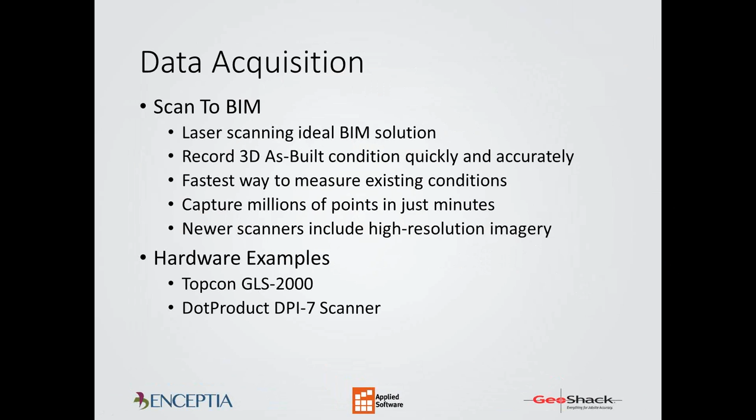I'm going to quickly show you two scanners, the Topcon GLS 2000 and the DotProduct DPI-7 scanner, and give you an example of how they're on two different ends of the spectrum, but can both be used and are very powerful for collecting data.

The Topcon unit you see here will shoot point cloud or measure out to over 1,100 feet, and it will easily collect points in full dome in about 3 minutes with images. There are 2 cameras on this unit, a telephoto lens and a wide-angle lens, so we can capture very high-resolution images if need be.

What's really different about this unit compared to others out there is that it will register scans automatically. Normally we have to set the scanner up on a tripod and move it to different locations in a particular area, then tie those different scans together afterward. This unit recognizes that during the scanning process and registers automatically for us.

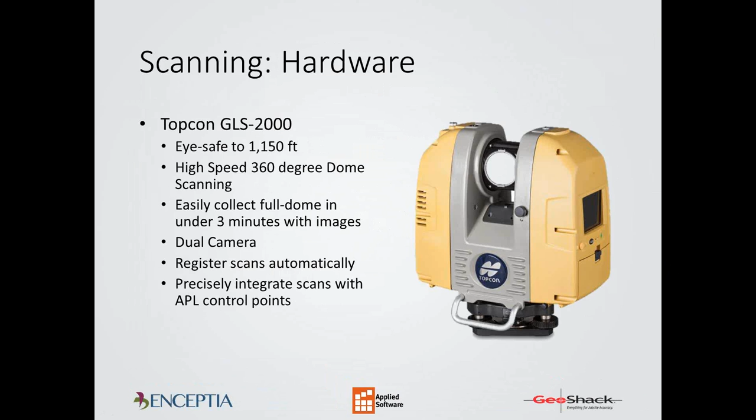Another important feature is that it integrates with APL control points. I'll show you Autodesk Point Layout a little later, but as long as we have control points at the job site in our model, we can take this point cloud and bring it into our model quickly and compare it to our design model.

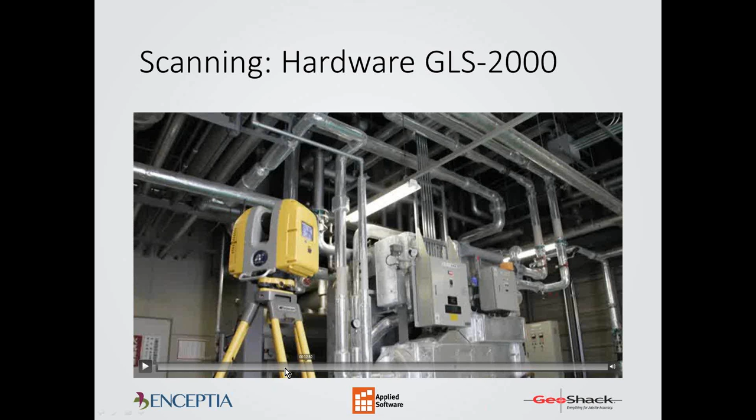Now I want to show you a quick little video, I'm going to turn off the volume here. It's a very short video. This is a picture of the room, there's the scanner. For those of you who haven't seen point clouds, you are looking at a point cloud.

Notice that as we move around, the imagery fades a little and we're looking at the points, but as we stop, all those images that have been recorded now become visible. So it looks like we're in a true three-dimensional model when really we're just floating around in our point cloud.

We do work with other partners that will recognize these points that represent a pipe and replace those points with an actual pipe, so there are ways to convert this point cloud into a BIM file to use back at the office. On the opposite end of the spectrum is this DotProduct DPI-7 scanner.

It's a small handheld unit, and what's great about this unit is it's great in tight spaces. One of the things with the larger scanners is that you have to move them constantly. They set up in one location, but they may not see the entire room because objects may be in the way. With this unit, you are literally walking around the space, and you can walk around objects that are hiding specific locations in the room.

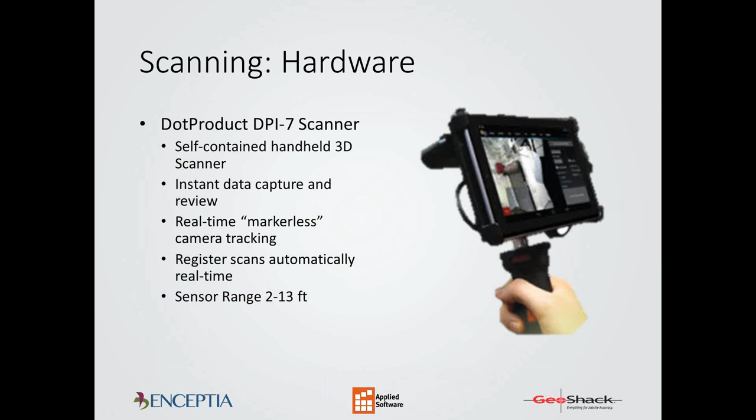It also has real-time markerless camera tracking. You may have seen scanners on job sites where they place markers up on walls or columns, used on purpose to tie those or register the scans later on. With this unit, it'll register the scans automatically. The range on this unit is anywhere from 2 feet to about 13 feet. That may not sound far, but for what this is designed for, it's the perfect solution.

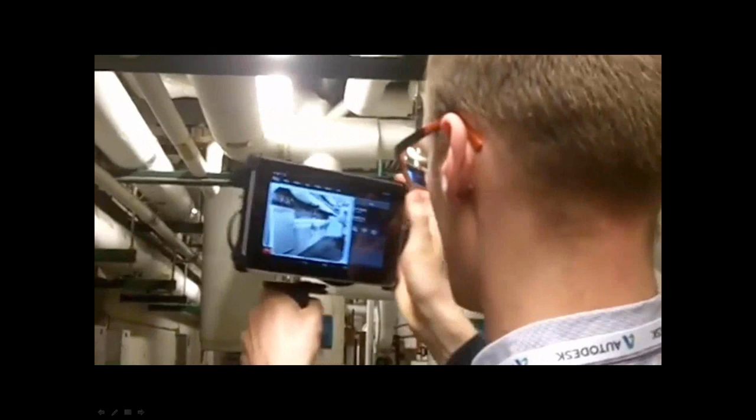I'll just show you a quick video of what it looks like running this scanner. Here we're holding the scanner. You got a nice big screen, you can see it, it looks like you're shooting video. But what we're going to do is get this set and hit the record button.

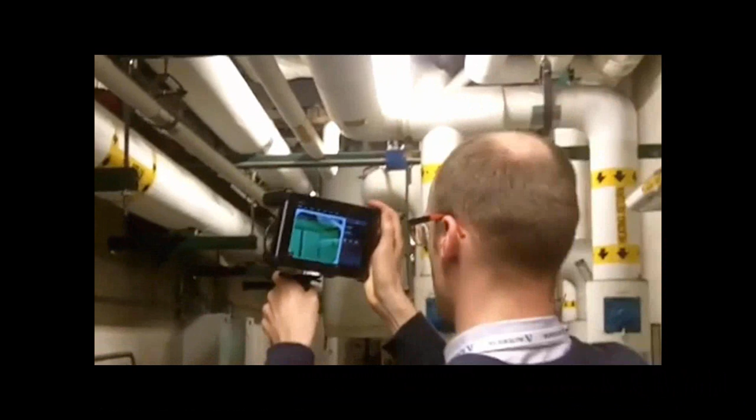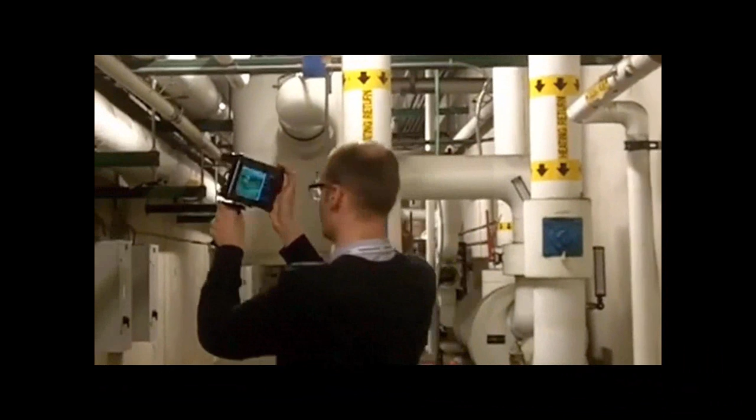The screen turns green, and now you're just walking along, scanning everything that you see on the screen. You move this up and down and around until you grab all your points. If later you find out you missed a spot as you're reviewing it here, you can go right back to it and it'll register the scan where you left off.

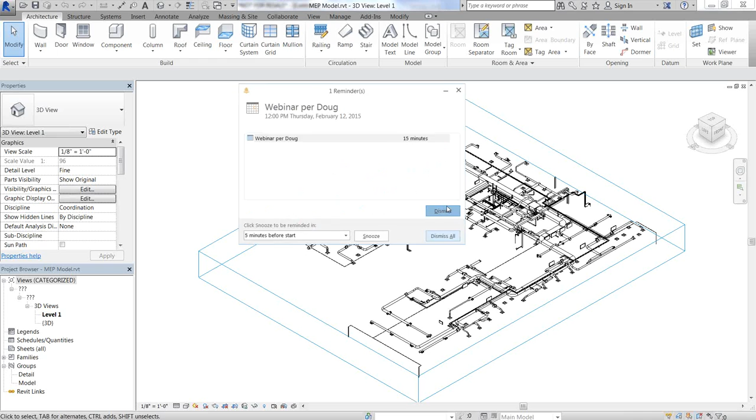To do so, for this example, I'm going to use Revit to export out my system and send it directly to ESTmep to get my estimate. So let's go ahead and select my medium pressure duct.

Now in my add-ins tab, I have store design line elements and store graphics elements. Store design line elements is used where Revit elements can be mapped to corresponding items in CADmep, such as ducts, pipes, straights, and fittings. Graphical elements is used where no mappings can be made between Revit elements and CADmep items, such as air handling units, pumps, and things like that.

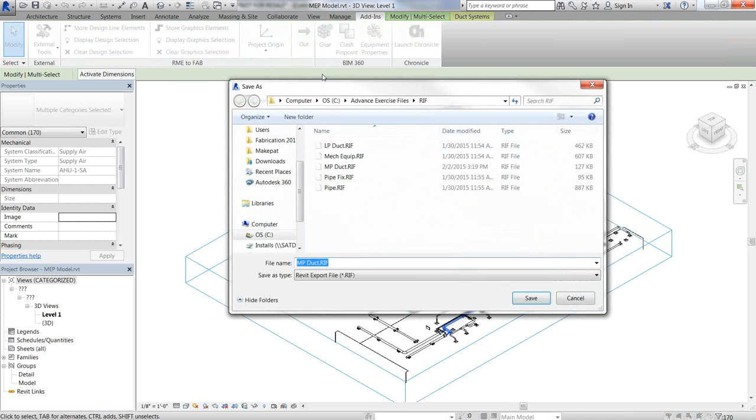So I'm going to select store design line elements and save this out as my RIF file. Once I have that done, I'll go ahead and bring that directly into ESTmep.

One thing I'll note here, with fabrication products having a unified database, I can bring this directly into ESTmep, and that will allow me to send it straight to CADmep to finish out the detailing and CAMduct. So that's really what I want to show in this process.

Go ahead and import that RIF file. You'll see here, I've already gone ahead, and it remembers since I've done this already, I have my system type and my system name. Here's the information brought over from Revit.

I'll simply select the service that I already have defined in CADmep in my database. The service has my pressure class assigned to it, so when I convert this over, it will give me my standard straights and fittings based off of my shop standards. So I'll go ahead and select OK.

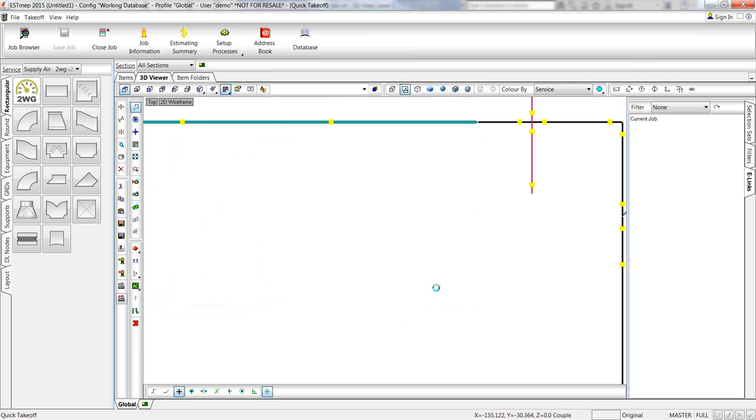And there you go, that was that quick, converting the Revit model. If I zoom in here and look, you'll see my straights are based off my pressure class. You also notice that there's some missing gaps, so while this is a good conversion, there's still going to be some things that need to be fixed.

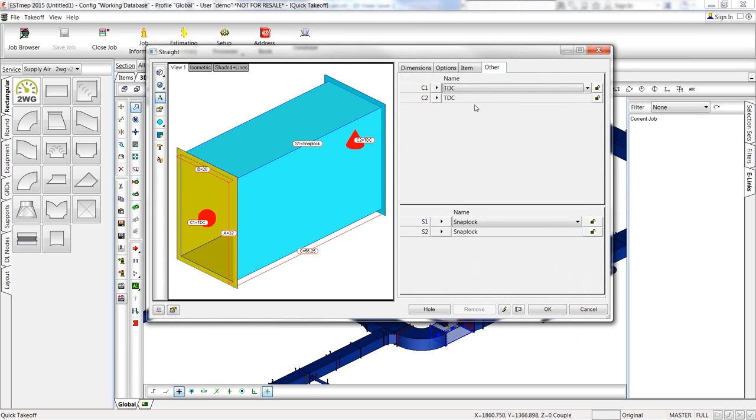So like I said, if I look here, here's my standard straight, following my pressure class, giving me the correct connectors and seams. We'll worry about fixing this stuff once I bring it into CADmep.

Run my estimating summary. Here it will give me a material cost, fabrication cost, and install cost, all set up based off of your shop standards, and give me a total.

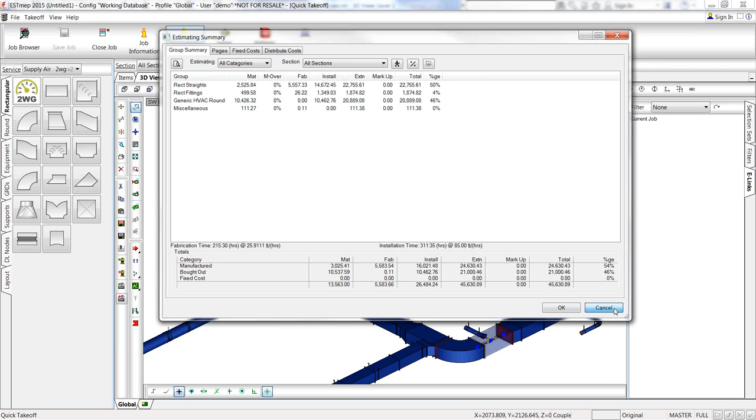If you're using plumbing or pipe, you can also use Harrison or a similar supplier to bring in your pricing. You can also run reports, so here's an ancillary list, as well as export this data out to Excel.

So once I've won the bid, I'm ready to send this over to CADmep and let my detailers finish out and fix some of the things. So I'm going to go ahead and save this.

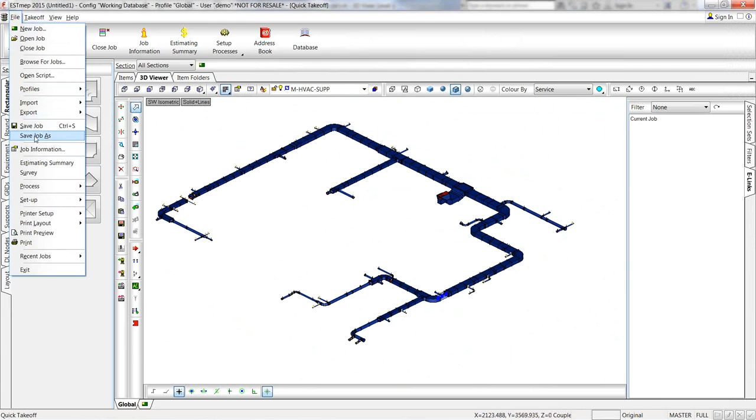And open up CAD. I'm going to open up that same exact design in Est.

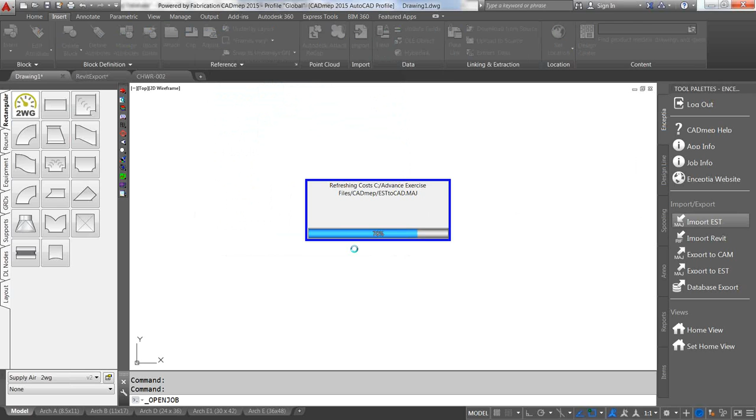Now that I have it into CADmep, I'll go ahead and make the changes I need to, so I can get it ready for coordination. I've gone ahead and made some changes and fixed some others as well. I wanted to note that when I bring it over into fabrication, with design line, it will fill in my hangers automatically. That's one thing that was added from the Revit file to CADmep and ESTmep - my hangers. Now that this is ready to go to Navisworks, I'll send it over to Mark.

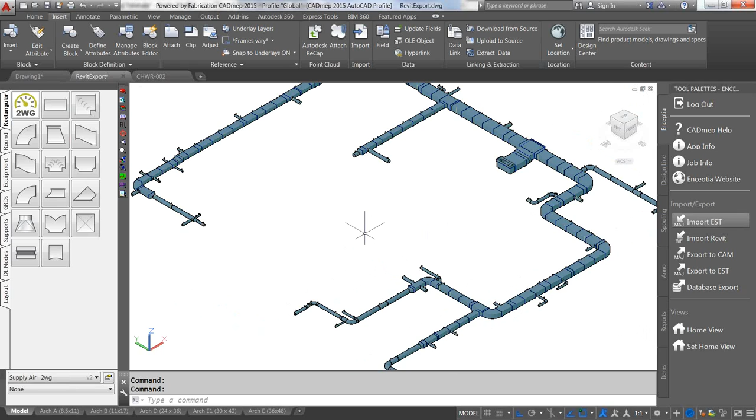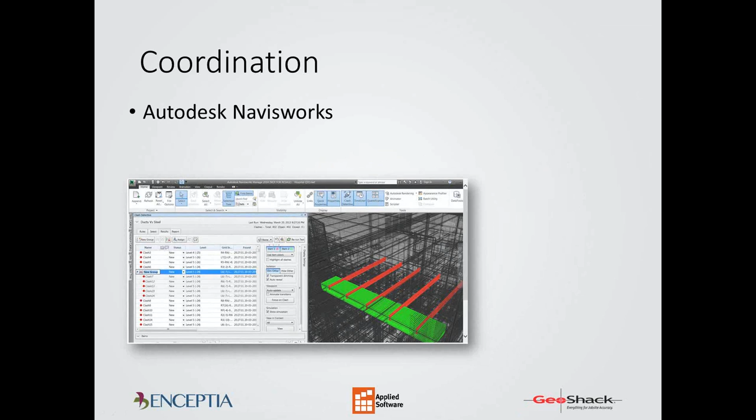All right, thanks, Lyle. Now I'm going to talk about coordination because we have that design file that Lyle has done. We want to make sure it's coordinated with the rest of our project, so we have a couple different ways of doing this. Autodesk Navisworks has been around for years, and traditionally we've used this primarily for clash detection. Navisworks does a whole lot more than clash detection, but that's mainly what everybody uses it for. Recently, Autodesk BIM 360 Glue.

It's another product by Autodesk, and it's a cloud service that lets us do clash detection in the cloud. So both units allow us to do clash detection - we get reports and can find out where the clashes are. But there are some advantages that Glue has that Navisworks does not have, and there are also some advantages with Navis. Let's look at the workflow when we use Navis, and then the workflow when we use BIM 360 Glue for coordination.

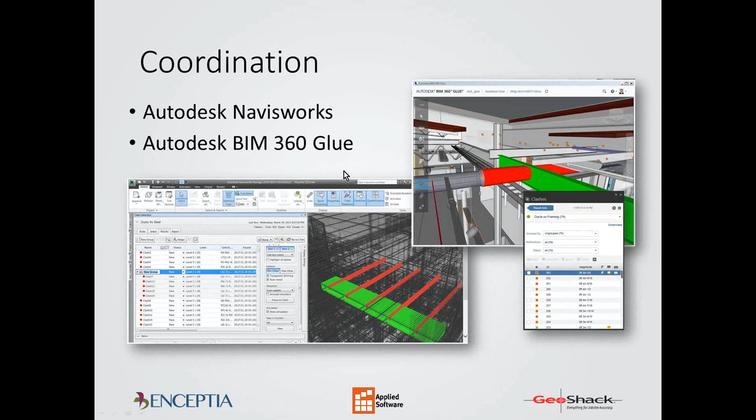So, Navisworks Manage - typical workflow. Typically you have your architect, your structural engineer, and your MEP engineer, all working in their own little silo creating their models, and then they send it to a BIM manager. Typically the BIM manager will collect the files. Now the way the files are sent traditionally has been like FTP, and that could take many hours. Then the BIM manager has to download those files, put them all together, bring them inside Navisworks, and start generating clashes.

When clashes are complete, clash reports are sent to the architect, another set is sent to the MEP engineer, and each discipline works independently trying to resolve their clashes. Once they resolve their own clashes, the architect will get the files back to the BIM manager, maybe in a couple days. The MEP engineers are a little better at this, getting their files back maybe on Wednesday. On Thursday, the BIM manager collects all the files and starts clashing again. By Friday, they may have resolved 50 clashes, but because the architects and engineers have been working in their own files, there may be 40 new clashes created because they didn't know about changes taking place with the other disciplines.

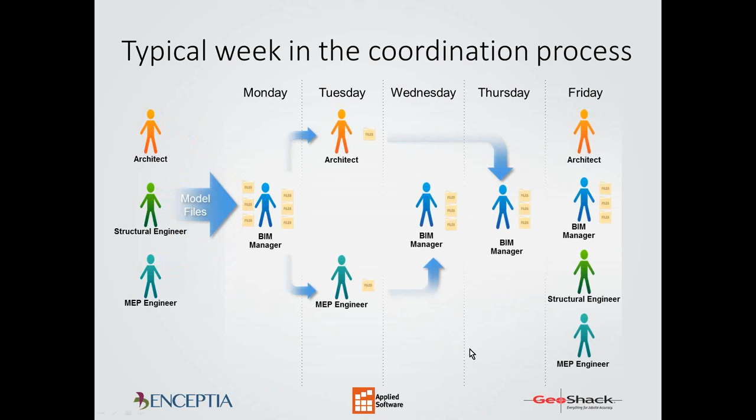Now, this has been the traditional workflow with Navisworks Manage. It can always be improved - it's still a very good workflow, but let's talk about how BIM 360 Glue will be able to do that.

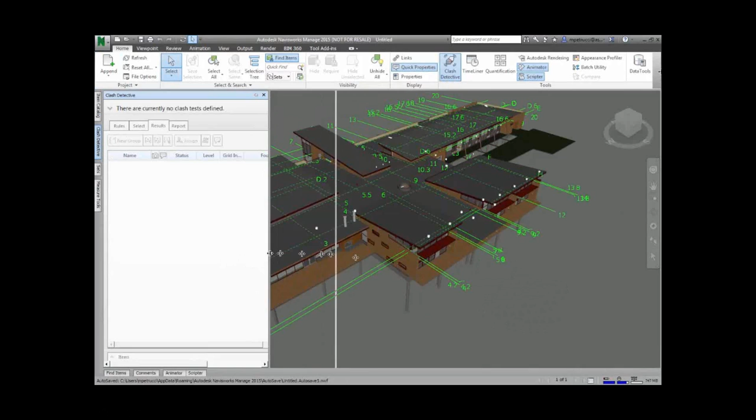And actually, I have a video very quickly, which I forgot about. This is going to show Navisworks and how quickly we can do a clash. In this particular file, I have structural, MEP, and an architectural model that I'll bring in. I receive these files from the architect using AutoCAD or Revit, and I'll just quickly generate a clash report.

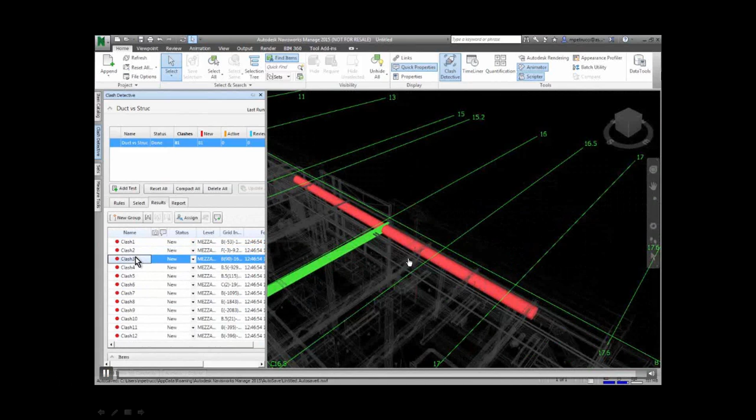So I want to clash and see if I have any ducts interfering with my structure. I'll go ahead and select from my MEP model, just my ducts. Now this is the BIM manager doing this, and quickly, instantly, we get a report. Here's clash number 3, and when I select it, it takes me right to where the clash is. If I keep clicking on a different one, it takes me to a different clash. The rest of the model is grayed out, so it's very easy to identify. What we typically do is generate a report, a paper report or an electronic report, that gets sent off to the architect and engineer.

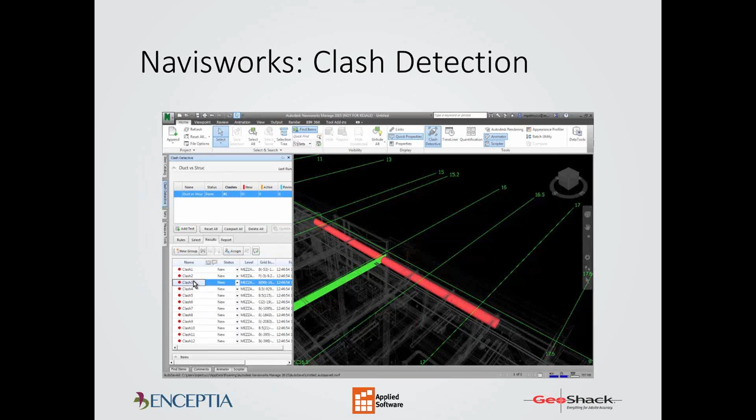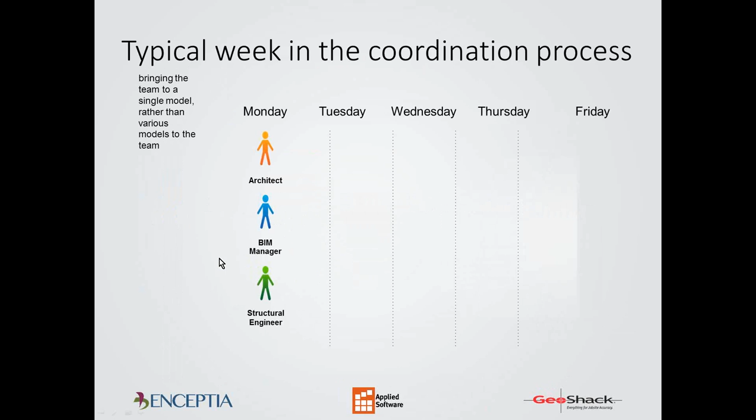That paper report is obsolete - as soon as one person makes a change, it's obsolete. So with BIM 360 Glue, on Monday the architect, the BIM manager, the structural engineer, MEP engineer, instead of sending their file to the BIM manager, send it directly up to the cloud, to the BIM 360 cloud. Now at any time during the week, the structural engineer and MEP engineer can compare their models. The MEP can quickly do a clash detection anytime, and they don't have to wait for the BIM manager to collect the files and send the reports out.

It's advised that as you're working on a project, you update the model in the cloud at least once a day, if not 2 or 3 times a day. It's very easy to do with just one click of the mouse. So really, we can get a coordinated model by Thursday instead of Friday. We finish a little sooner, and we'll have fewer clashes because we're always comparing our updated model with what's in the cloud, and as long as everybody's updating regularly, we'll be able to resolve clashes much quicker.

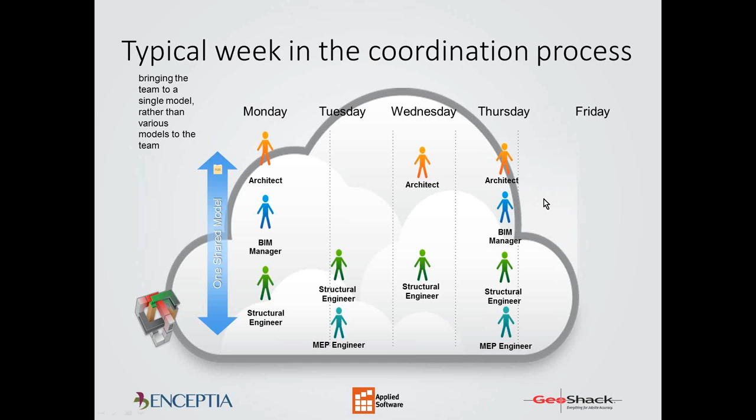Some key advantages of BIM 360 Glue coordination over Navisworks: first of all, the model is up in the cloud, so there's always the latest version up there. A nice key feature is that we can run BIM 360 Glue on the iPad, so I can review the model on the iPad as well as in the office, and at the same time do markups in both locations.

What's beautiful about doing markups using BIM 360 Glue is that there is a view that gets saved wherever the markup is, and you send that off to the person who needs to resolve that particular issue. As they resolve it, they'll get a link, see it, and know what corrections they need to make. They can quickly update their model and repost a new model up to the cloud, or glue a new model up to the cloud.

The round-trip workflow - there's a feature inside of AutoCAD, Revit, Navisworks called Pinpoint. When there's a clash up in the cloud, I can pull that down into my model and pinpoint where it is, so it'll highlight a specific object that's clashing. I don't have to go searching for it - Pinpoint will take me directly to where that clash is, or the object that is clashing.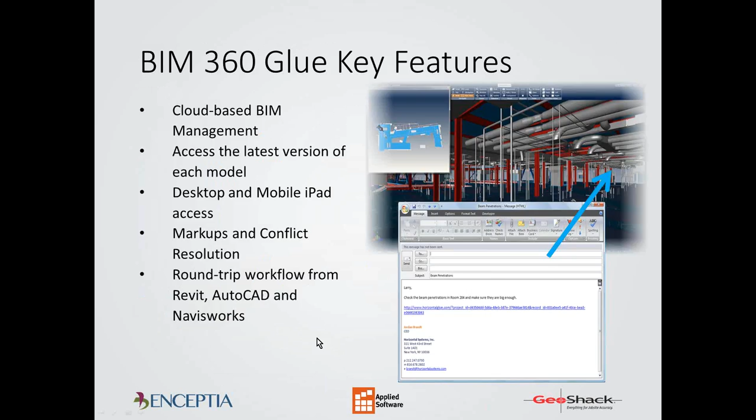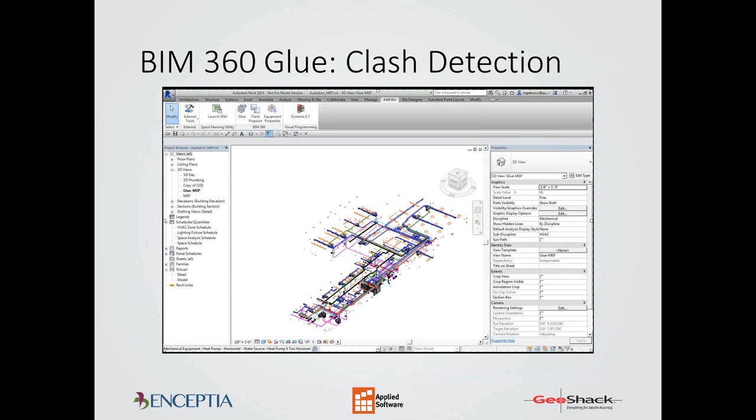You'll see right up here, this is Revit. Here's Glue, and I would just click on it to glue my model up to the cloud, and here's my pinpoint. After I do my clashing, I would do pinpoint. I'm going to go ahead and just show you a quick video.

So one click, I click Glue. The first time it's going to ask me where to post it. I'm going to pause this right now and post it to a specific project that the BIM manager has set up. Once it's been set up, anybody who's been invited to this project can glue their model. I can also review markups, clashes, any new views that have been created, and this list of files recently modified. As I access this project, I can see all the activity that's happened with my model.

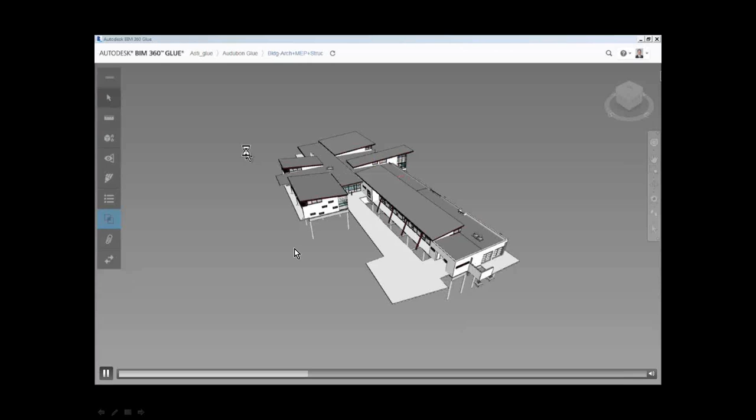I am now opening up the glue model from my desk, but it's the same workflow as from the iPad. On the desktop, I already have a clash report created, so I'm going to rerun it. As I run this, I'll notice that I have a list of clashes - I have 79 clashes. Just like in Navisworks, if I select the clash, it takes me directly to it and highlights the 2 objects.

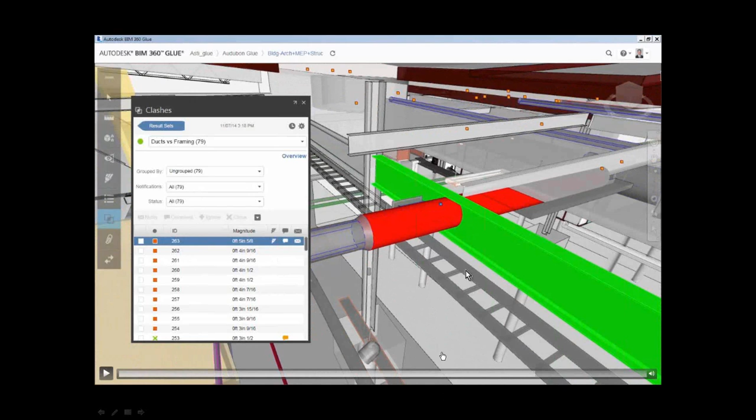There's actually another screen I could turn on that gives me more information about each of these objects. But I can see visually where they are clashing, and from here, I could email that clash to the necessary people to get that resolved.

So now the purpose here is to make sure that we have a coordinated model. By taking all the reports, the clashes that we have found, and then resolving those clashes and updating our model to resolve those clashes, now we're ready for fabrication.

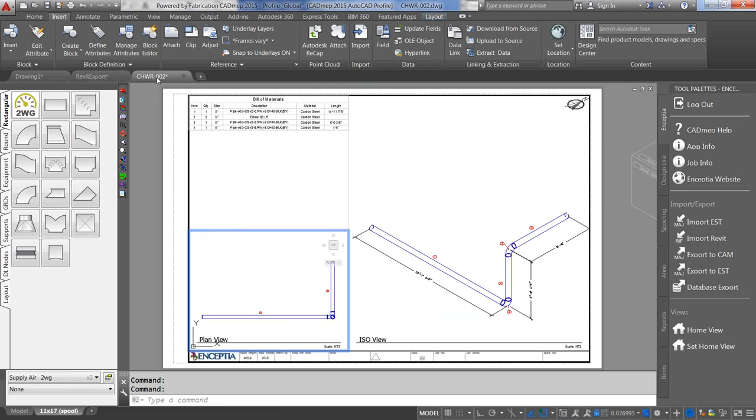Okay, so now that this model is ready to be fabricated, for this exercise, I'll send this to CAMDuct since I've got sheet metal items in here, as well as if it was pipe or plumbing. I can go ahead and create my spool sheets in here, or create my linear nest sheets for my pipe cut list.

So to export this out, I'll just cam it out. I've already done this to save some time, but what I want to note here is after I've cammed it out, if I take a look at the status on my items, it's issued for manufacture. We'll take a look at this in CAMDuct after I nest it and create the NC file.

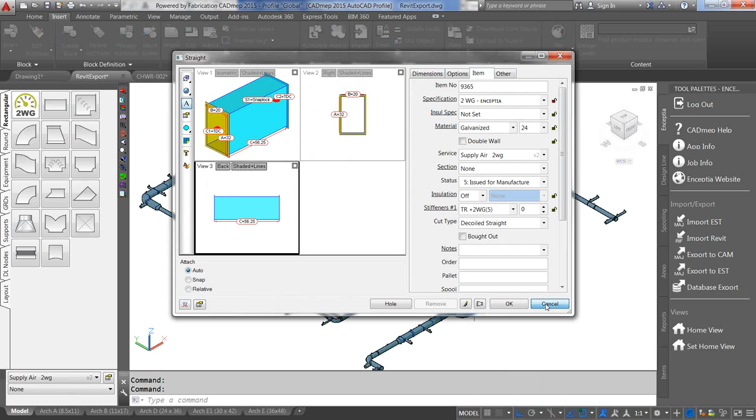So once I've exported it out, I can open up CAMDuct, open my job, and take a look. Here are just those items that I exported out, just my rectangular pieces. So once I have it in CAMDuct, and CAMDuct's been set up for your specific equipment out at the shop...

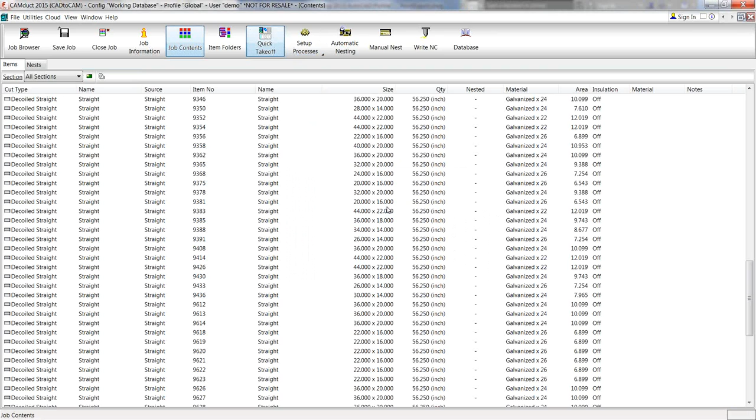I can set up a process to easily create my NC files. With this process, I can also have it automatically print reports and labels. So let's go ahead and select my process. And what you're seeing here, it went ahead and created the NC files that I need for the table.

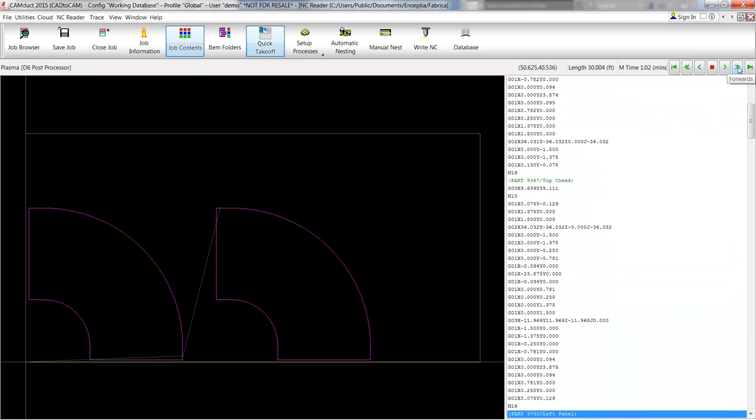It was that quick. If I go out to the shop, I can punch in this NC file. I can also preview it in CAMDuct to make sure that it's going to do what I want it to do at the table before I burn this. It's just kind of a checkpoint to make sure that it looks correct before I burn this. Just kind of speed that up.

As well as, like I was saying, some of my labels and reports. I'll take a look here, going back to that status, I can print out my item labels and put a QR code or barcode, so that way I can use Tracker to scan each item, and it will change my status depending on wherever this is at in the workflow. So I've gone from EST to CAD, from CAD to CAM, out to the shop, onto the truck, installed, and so forth. So I can track that whole process by using Tracker.

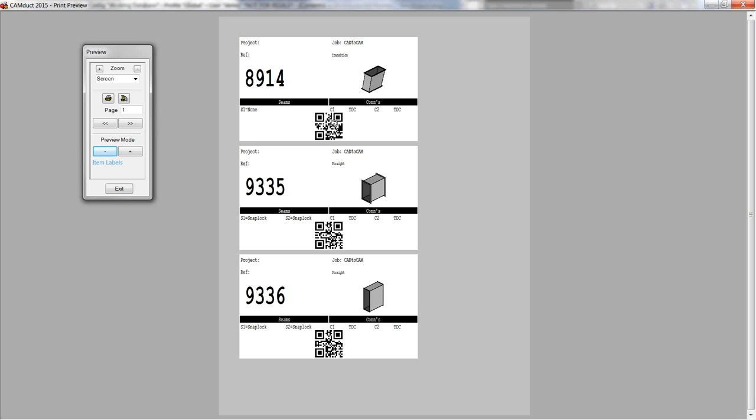So here's my item labels. Here's a weight summary sheet giving me a total of metal used, and my ancillary list.

So once that's done, then I'll send this back over to Mark and we can take this model out into the field.

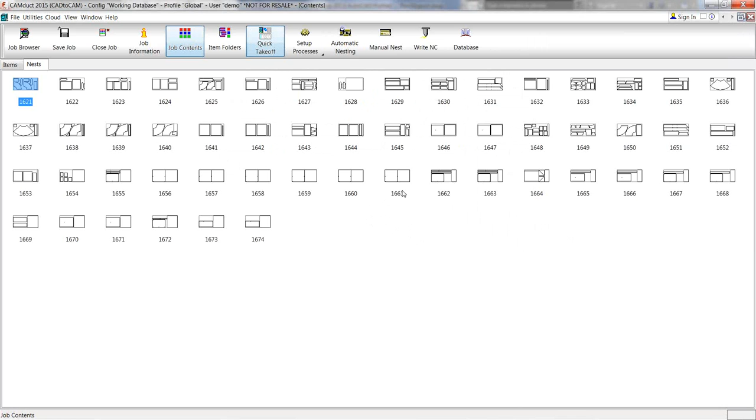All right, great. So now we've got our product. We want to go install that in the field. So we need a quick and accurate way to locate in the field. So this is where Autodesk Point Layout and robotic total stations come in.

So how do we do this? It's really very simple to get our MEP CAD BIM data to the field. And I put here it's as easy as 1, 2, 3, 4. First we need some equipment, robotic total stations. Next we need Autodesk Point Layout. It runs inside of Revit, AutoCAD, Navisworks.

We identify the key users, typically our BIM team and our field team. It's important that we get them both working together so that on step number 4, in 3 to 4 days of training, you can be fully integrated and working together to get the CAD data, the BIM data, out to the field accurately.

So how have we always done it in the past? Traditionally, we've always done it with a tape measure, printed hand or CAD drawings, field notebooks. Who knows if we have the latest drawings? And with tape measures and field notebooks, mistakes happen.

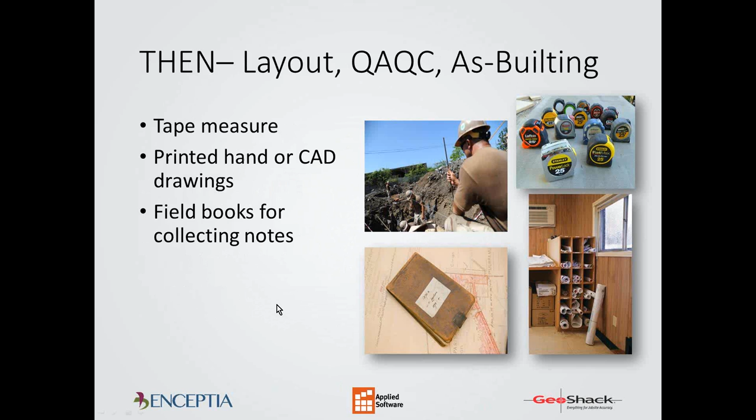We don't mean for that to happen, but sometimes we'll take a measurement that should be 16 feet 9 inches, and we measure 19 feet 6, and we write it down incorrectly. Well, we need a way to reduce those mistakes, and that's where the robotic total station comes in.

This particular total station is the Topcon LN100. It's completely robotic, and when I say robotic, that means one person can operate this. In the early days when I was working in the field, there was always 2 or 3 of us. I was the rod guy standing there with one guy looking and telling me which way to go.

Well, with the robotic total station, I set this up. I have a handheld tablet PC, and I look on the PC and it tells me where to go to locate my hangers, for example. What's really nice about this unit is it's easy to set up.

It's self-leveling. Basically I press this green button, wait about 45 seconds, it'll spin around, make sure it's level, and I'm good to go. It'll shoot up to 330 feet, so about 600 feet total diameter, and I'm accurate to within 1/8 of an inch.

I can shoot to a prism, or I should say I shoot to a prism to measure. There are some units out there that will shoot prismless, but depending on the angle in which they hit, it's not as accurate as shooting with a prism.

So here's an example. These are the basic components that you need. The robotic total station can be mounted on a column. On the MEP side, if you get into the project when you have metal deck, get a column clamp, clamp this to a column, and then you can locate where to place your hangers on the metal deck.

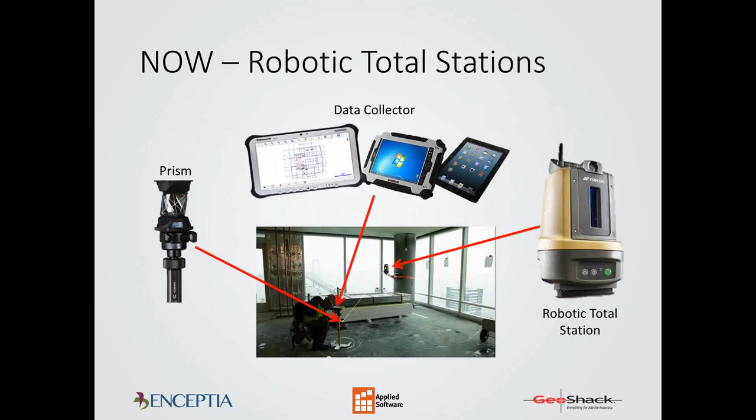You can punch through, put in your hangers, and then proceed on. The data collector, which runs Windows 7, and just recently on the iPad, you will see a floor plan of the space you are in. The total station knows where it is, it knows where you are, and it will direct you where to go. Literally, this person you see in the drawing does not need to pull out a tape measure. He could just simply look at his screen to move around. And the prism is what we're measuring to.

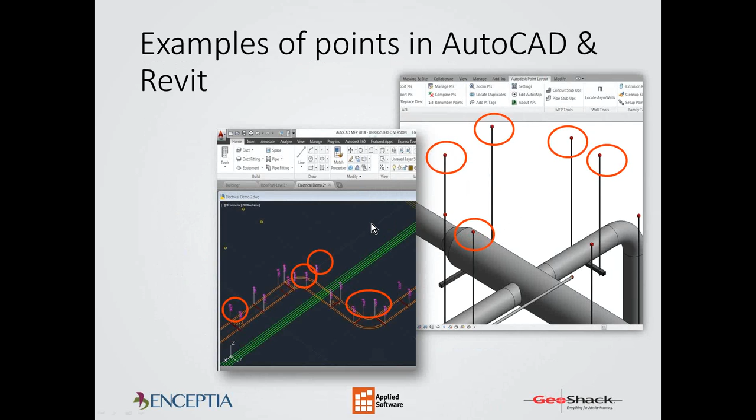So there's the equipment. Well, to use the equipment, I need to get some points. So what are points? Here's some examples of what points may look like. On one side I have Revit, on another side I have AutoCAD. I have some hangers, and at the top of the hangers gets placed an object. That object will have an X and a Y coordinate as well as an elevation coordinate if needed. It's not always required, but it's always there.

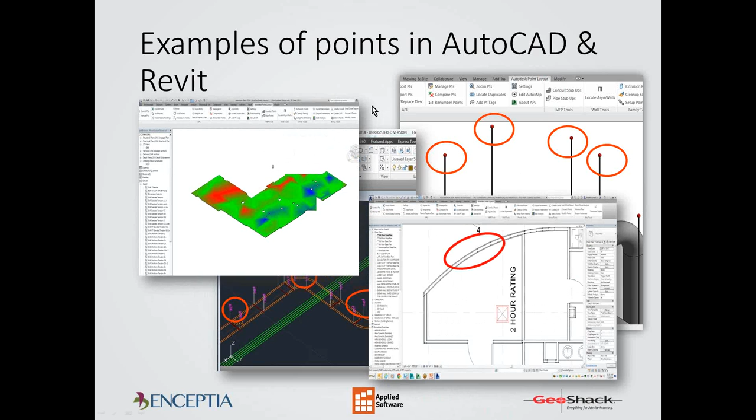Those points then I could use with my total station. Other features I can do is I can locate walls, or with a feature in Autodesk Point Layout, I could do a slab analysis to see how flat a floor is. So there's a lot that we can do with APL than just locating our hangers, but it is very important that we use that to do it accurately.

The three major workflows for APL: one is layout. That's where we put the points in our project, and then we transfer them to the field, and we can locate those points accurately, efficiently, and reduce errors. If I measure with the tape wrong, I don't know that till later on in the project. If I use a robotic total station to locate my points, if I'm not in the right spot, it tells me. If I'm off by a certain tolerance, it will tell me.

So there's no reason for me to make a mistake out in the field with a robotic total station and APL. Two, QA/QC. When those points are located in the field, I can collect those points and then compare them to my design model. And I could say, show me all the points that are off by 1 inch or 1/4 of an inch, whatever I want to set. So I can do quality control just to make sure that what is being laid out in the field is matching my design model.

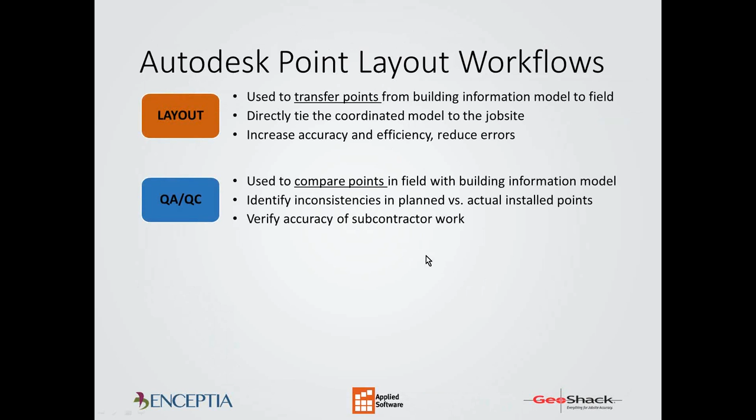Now, for some reason, if points were moved on purpose in the field, I'll see that too. And then I can update my model to match what's in the field, which leads us over to as-built. There may be objects that are not in my model, but I want to record them. And so I can record points that are out in the field, such as maybe an existing pipe that's not in my model. I could shoot those points, and when I bring them back into my BIM program, I could say connect those points with duct or pipe or a wall or whatever other object I want to put on those points.

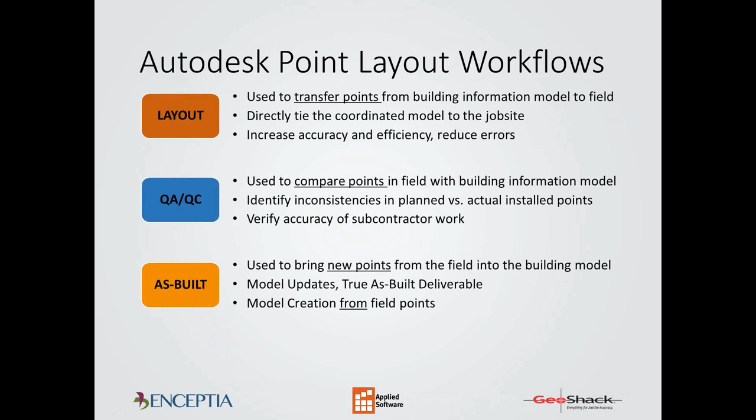This is a video, but what I'm going to do is actually go ahead and show this to you live. So here's an example of a Revit model. I have some hangers in here, and I have some pipe. Just to show you how quickly we can put points in here, I'll use Autodesk Point Layout. There's a pipe point routine, and I'm going to go ahead and just do all the points in my project.

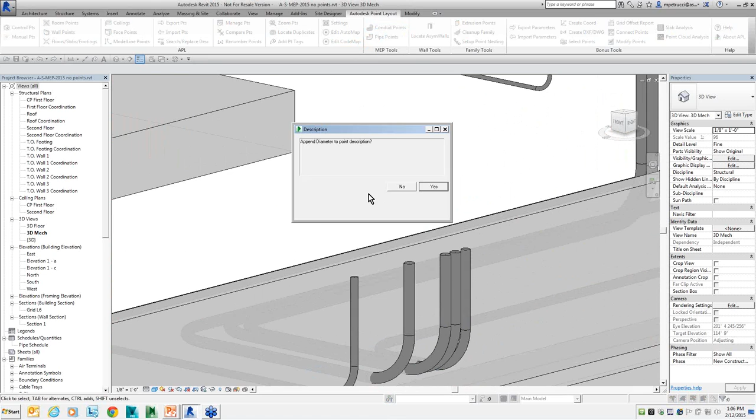I'll do all the vertical, and I'll do both the top and bottom. And I can give this a description. I can use a standard description, or maybe custom - I just want to put in here, just generally pipe point. And then it's going to ask me if I want to include the diameter, and I'll go ahead and click yes. All of a sudden I see these little points that appear.

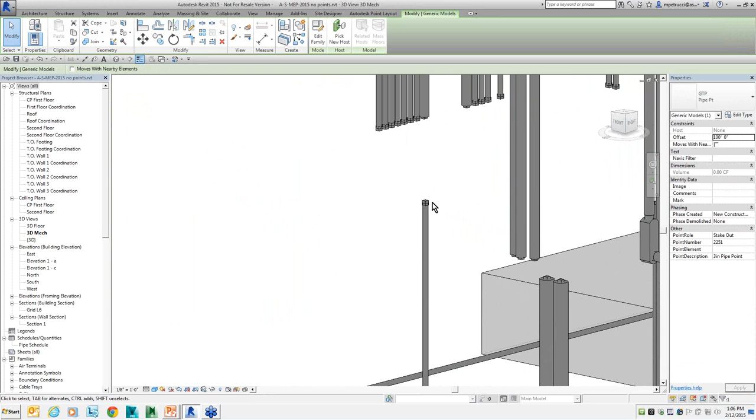When I touch on this point and I take a look over here, this tells me it's point number 2249, a 2-inch pipe point. If I click on the next one, it recognizes it's a 3-inch pipe point. All my pipes, all my vertical pipes, and conduit, if I want to do conduit as well, I can place points on them that quick. As far as my hangers, I can select the hanger and quickly modify it. I just put 2 points on the top of my hanger. I'll push that back into my project.

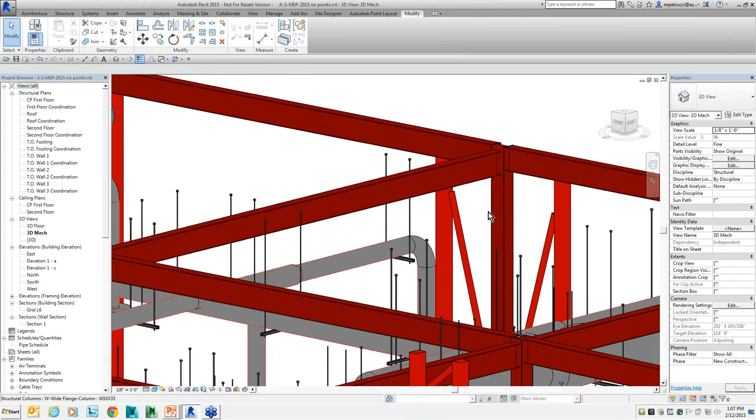And I'm going to overwrite these, and immediately you're going to see little points show up here. Those points now have a coordinate associated with them, and they're associated with the project, so I can quickly and accurately locate those points. With Autodesk Point Layout, once I locate these points in my project, I want to give them to my field team.

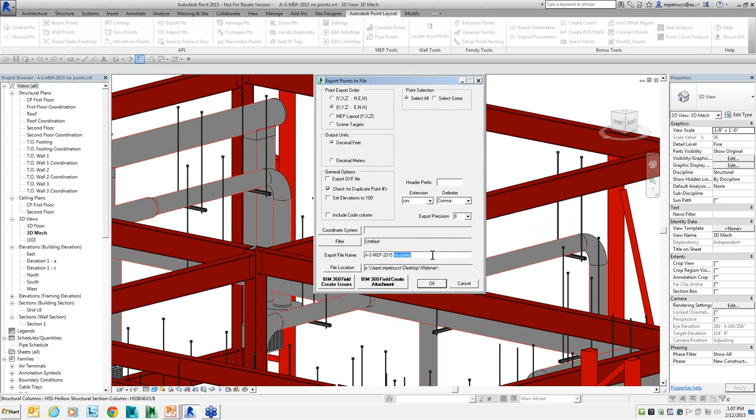So I'll go ahead and export the points. If I go to Filter, I can come down here and select all my duct points, or maybe my pipe points. But I'm going to select duct points. I'll click OK, and then export these out to a file. Maybe I'll put in here 'points to layout,' and save that to my computer.

What I'm going to do is switch to a project where I already have some points in there. Looks very similar. But now let's say my guys have gone out to the field, they located those points. At the end of the day, they're going to give me that point file back. I want to see how accurate they were at laying out points.

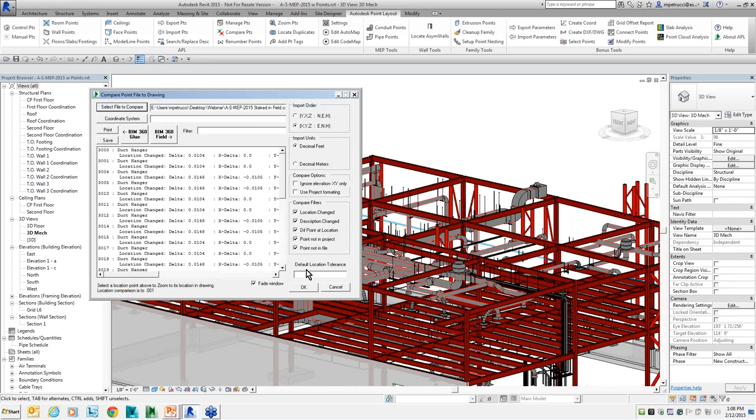So I can do, with APL, compare points. I would go ahead and select the file that they staked out. This is what they started with in the morning, and this is what they came back at the end of the day, staked in the field. I'll open that up, and immediately I can see that there's a delta.

I've got some points that are off by 0.01 feet, and maybe I want to filter this and just look for points that are off by more than half a foot. And I've got some points that are off by more than a foot. So I may raise the question back to my team and say, why did these points move? But I'd like to see how these points look inside my model.

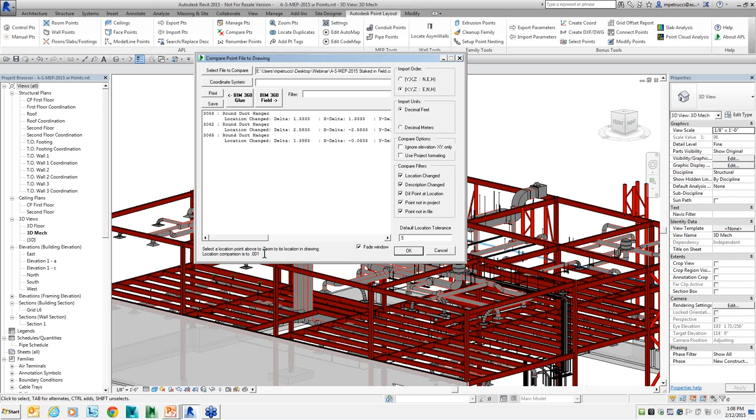If I click on 3058, it takes me right to that point, and I could zoom out and see this hanger is that point. Now I put a little circle here to note those particular points, and I purposely moved them. I can quickly see this hanger is interfering with the structural steel. Maybe the structural model wasn't up to date when I was placing that hanger.

So because they moved those points and they had to move, I can say, let's go ahead and import your points to update my model to make it a true as-built now. I'm going to select that same file, and just simply click OK, and it's coming back telling me that I've got some points that have to move.

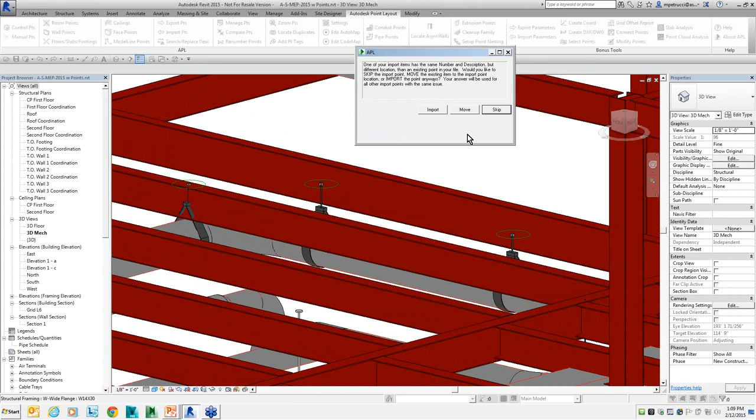So I'm going to go ahead and hit move, and keep an eye on these 3 hangers right here, you see where the circle is. This hanger was moved in the field, that's where it should be. These 2 hangers were moved as well along the ductwork, but you can see where they used to be. So that's how quickly I can use the information from the field to update my model.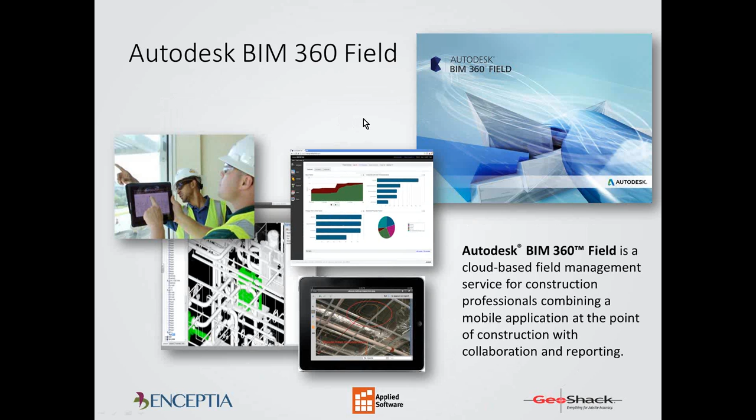Next, we're going to talk about BIM 360 Field. BIM 360 Field runs in the cloud, runs on an iPad, and it's a great way to manage your project. It's designed for the construction professional to use. With BIM 360 Field, we have all the information we need related to the project, and then we can generate issues and tasks and checklists to help our team in the field.

So it runs on the iPad. I'll go ahead and just click on a link to show this, and I'm going to talk about these different options or modules inside of BIM 360 Field. The most important one is issues, followed by checklists, equipment, tasks. Tasks may not be used as much, but you can choose what to use and what not to use. So let's take a look at each of these different modules.

First thing is the library. The library is where we can store all of our CAD data, PDFs, Excel files, Word documents, any sort of electronic file we want to go ahead and put in our library, and we can access it. It's a nice interface. You'll see a list here, a folder, and then you'll see a little preview of the different PDF files that might be available.

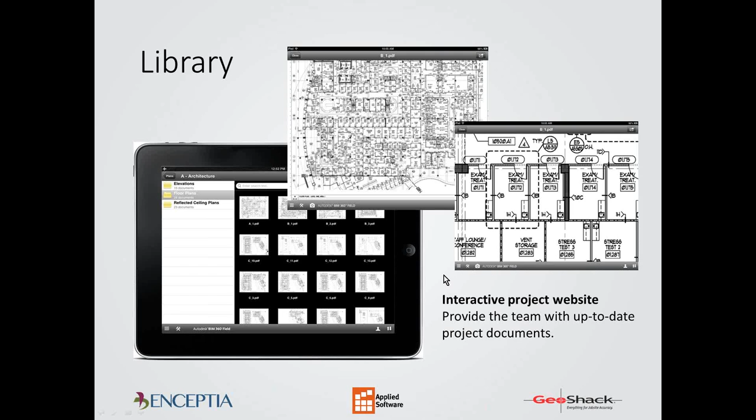Related to those PDF files, I'll use that when I want to create some issues later. But first, let me talk about photos.

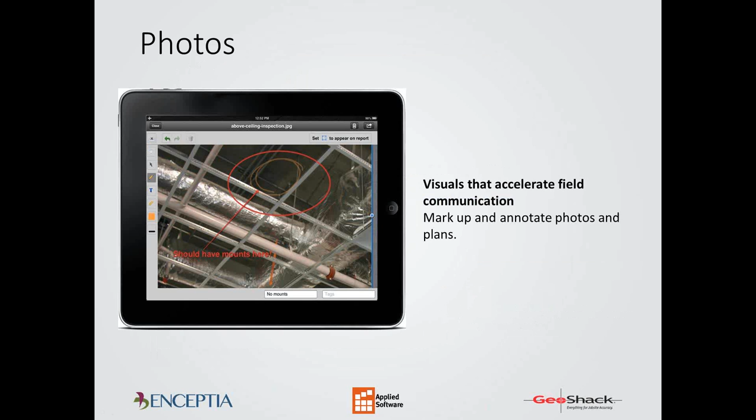Pictures are worth 1,000 words. I'm at the job site, I notice a problem. I can immediately take a photo with BIM 360 Field, mark it up, and then from there I can email or create an issue with this photo.

So issues - this is the biggie right here. I could log, assign, and track items to completion.

With issues, when you're walking around the project and you notice an issue or problem, you can immediately address that issue. BIM 360 Field will ask you to fill in some information, for example, what's the location and what is the issue.

If it's something having to do with MEP, it will automatically assign that issue to the MEP engineer. If it's dealing with structure, dealing with walls, it'll automatically assign it to the structural engineer or to the wall subcontractor. It automatically does that for you.

So you only have to fill in a few key pieces of information and a description of the issue, and from there the issue becomes open, and it needs to get tracked and resolved by the person it was assigned to. Once they resolve it, it goes back to the person who originally generated the issue, and they can inspect it, and if it looks like it's been completed properly, they can close the issue. Otherwise, they can send it back with notes to resolve the issue.

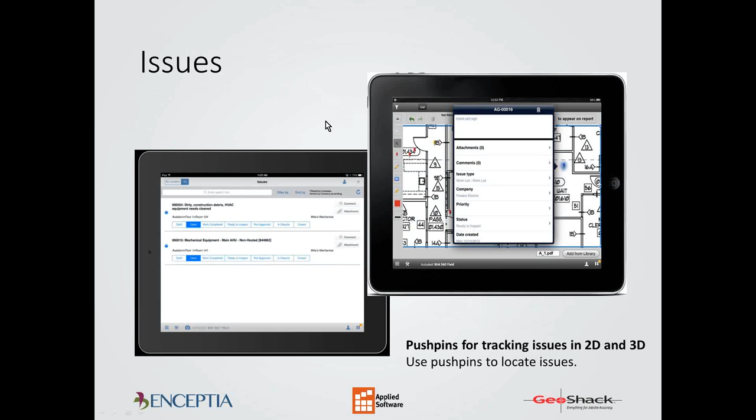Checklist. There are many predefined checklists. We can also help you create additional checklists. Basically, with our checklist, we can adjust the responses - yes, no, yes, no.

All the yes responses, great. If there's a no response, that means there's an issue created automatically, and immediately you have to fill in information, so now you have the checklist to help you generate issues. Great for people that are new to the field, to review the checklist and help them create issues when something doesn't match the checklist.

And with the checklist process, there's a little signature so people can sign off on it, and also the person inspecting it can sign off on it as well.

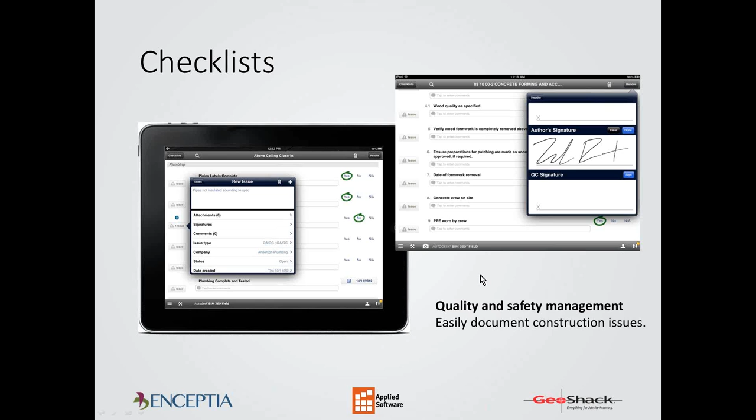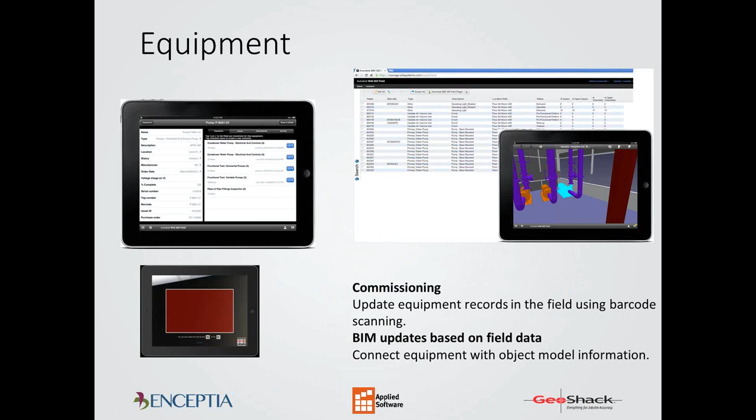Another key feature, equipment. Building components can be tracked from design to handover. There can be barcoding involved with some of the equipment that's delivered. With BIM 360 Field, I can scan the barcode, and any information associated with that particular object can be synced up inside Field and also synced up with my BIM file as well. It's a great way of keeping the model and the information coordinated.

Then reporting, and the reporting is typically done at the office. There are many predefined reports for you. You can create additional ones, and the reporting can even be set up to automatically send out a report at 4 o'clock Monday morning so that people receive a report on what issues are assigned to specific people or specific companies, which issues have been open the longest, and so on. So many different reports we can create with BIM 360 Field.

From there, I'll turn it back over to Lyle. Okay.

So now that we're at the final stage, now that I've brought the Revit model into the fabrication software, I've gone through the whole process, and now I've completed the job. I need to bring this back. This job requires a Revit deliverable.

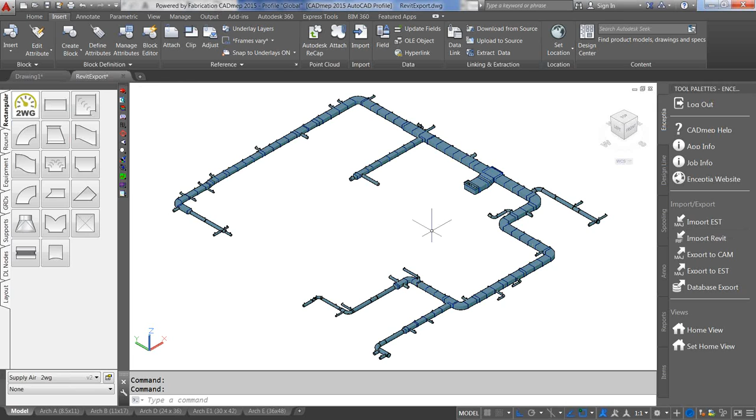Instead of going back into Revit, at this time I don't have an exporting tool that I can just send directly back into Revit, but what I can do is export this out as an IFC file, and I can bring this in directly into the model or send this out so that way they can bring that in. So to take a look at that, already done that.

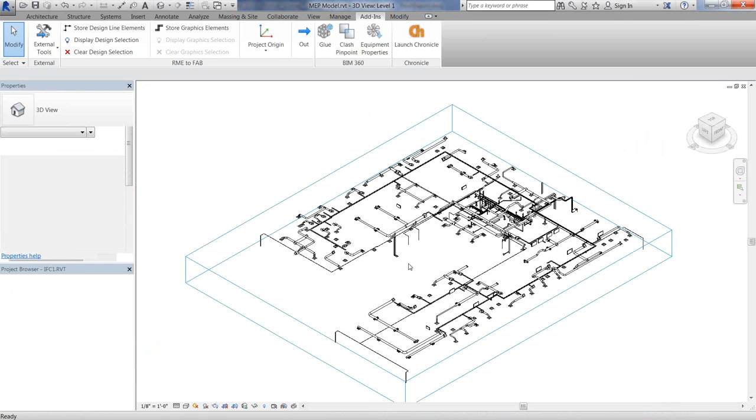I've gone ahead and deleted out those items. If I link in the IFC file, here you'll see now that I've brought in my fabrication intent model through an IFC, and it gives me everything that I've made changes to, added my hangers, and so forth. So this will give me my Revit deliverable, and really just allows me to do everything in fabrication without having to redesign everything into Revit.

So that concludes this part of the demonstration. Jeffrey?

Okay, great. Thank you very much, Mark and Lyle. That was awesome, and you know, I know that's a fast-paced presentation. Let me see here.

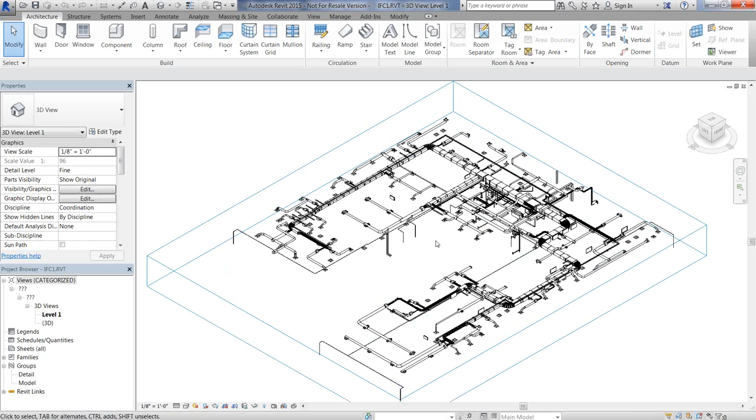All right, so let's just kind of recap what we talked about. Again, that is a tremendous amount of information to absorb. Before I go through this, I want to make sure everybody understands that the intent here was not to get into the weeds in a lot of these areas. There are a lot of important details that have to be addressed, but the goal of today's presentation was to show a complete workflow using Autodesk solutions, and also hardware from Topcon, Sokkia, and DotProduct.

The goal is to demonstrate how seamless this industry is becoming with respect to being able to move your digital information from design all the way through to handing over to the owner or customer. There's a lot of opportunity to avoid rework, for collaboration, for saving money in various ways, through simple productivity improvements.

Many of you know these things, but for those who may not be using all of these technical tools, that's where we'd challenge you to look for how you can move some of these tools into your organization to further improve. So let's go through this one more time.

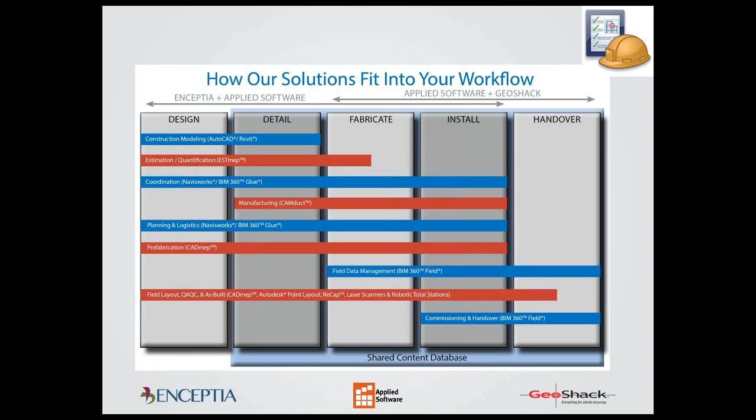And then, of course, I saw some questions come in regarding the capabilities of Autodesk Point Layout. And then, of course, Mark talked at length about the commissioning power of BIM 360 Field. So let's move on here to the question and answer session.